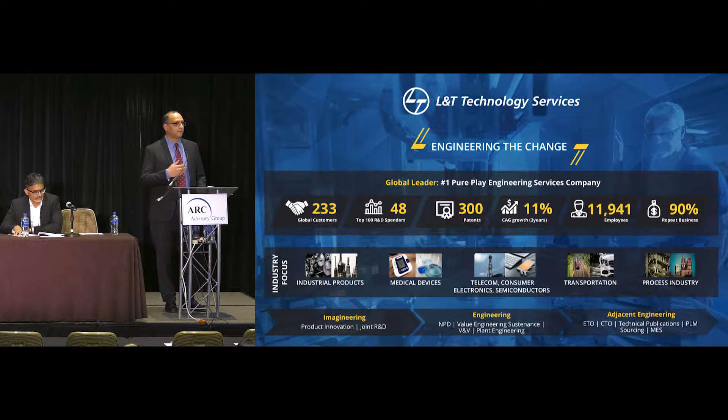Vinay, would you allow me to add a little bit here? Yeah, please, go ahead.

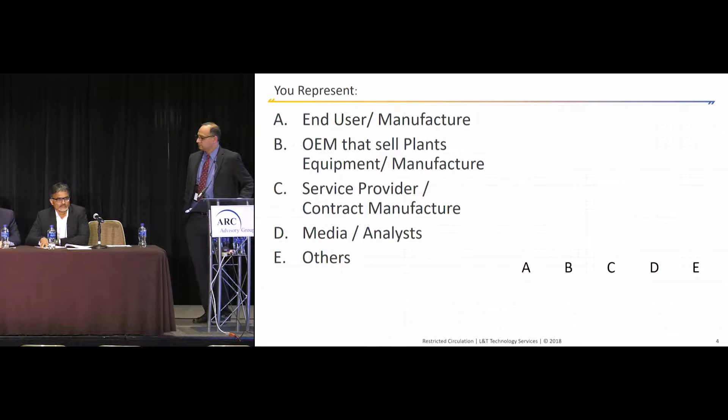When people go to work with an engineering services organization, I highly recommend that they choose one that has a PLC or DCS control systems practice, so they really understand what goes on in those systems and can integrate with them properly. L&T Technology Services has such a practice. They know how to spell PLC and DCS and work with those systems, so they're very competent in the industrial space.

Can I expand too? No, please, go ahead. Because it doesn't fit into a question.

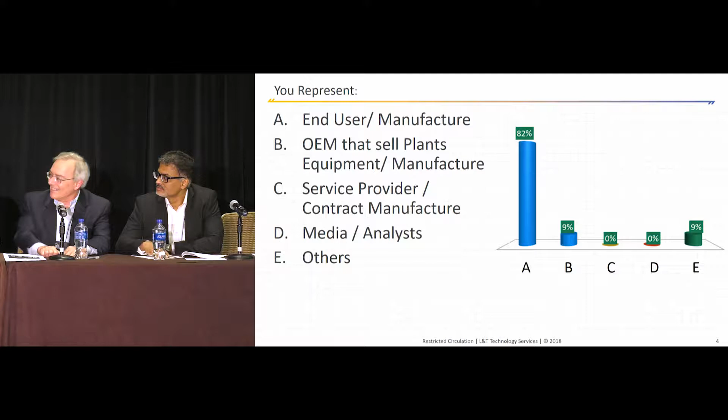It actually could fit into things about challenges - the idea of a company who really understands from data to the cloud down to the device, whether it's designing a machine, getting the data out of the machine to something in SCADA and making meaning of it, or knowing what you're going to do into the cloud. I've not met anybody who is really able to explain to me an end-to-end solution like they have. That's why I'm working with them. Kind of blew me away, really, to be honest.

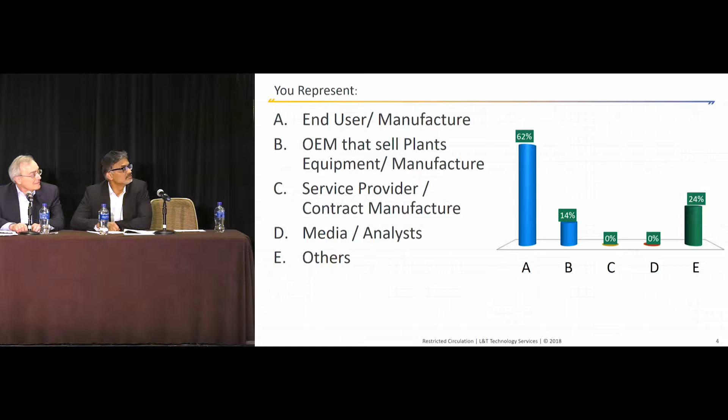Moving ahead, if we were to really look at the diversity which we have in this group, there's a lot of end users and manufacturers coming from manufacturing space. About 62% is end users. It's changing, so people are still voting. So maybe we should pause, Samir.

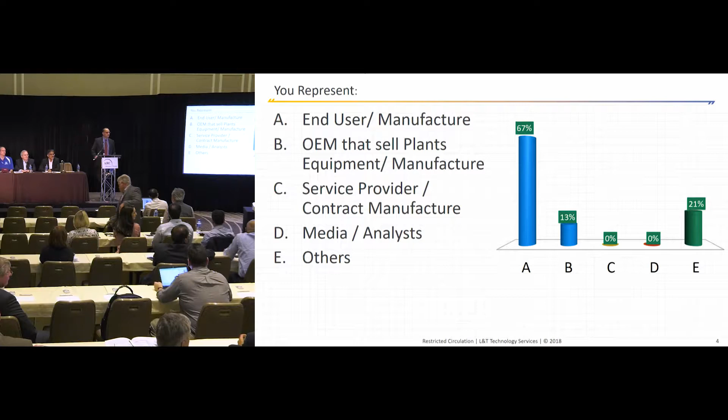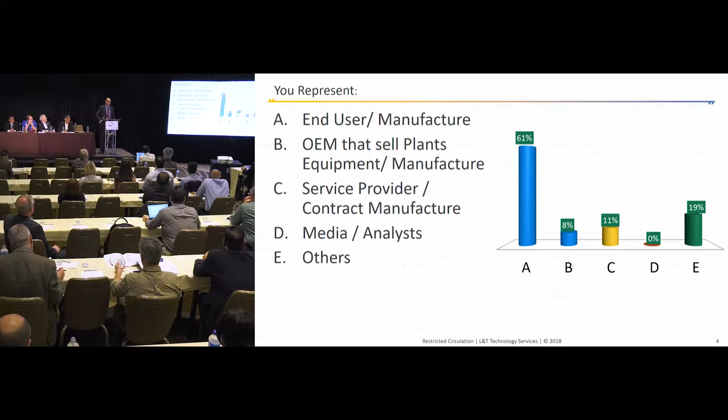So if you can just vote on this, we'd like to capture what mix we have from a participation standpoint. They didn't give me one of the beepers, so I can't press D.

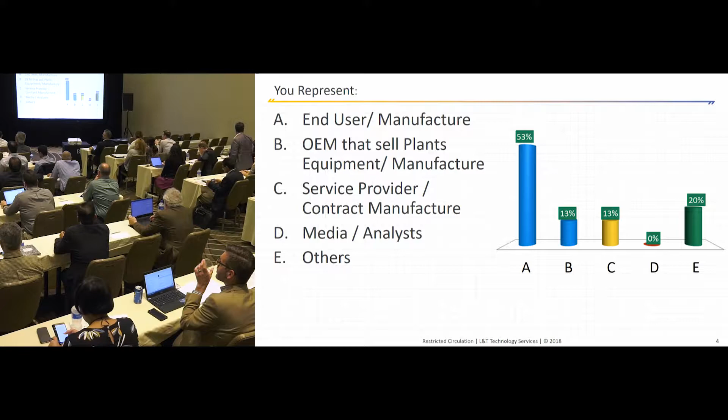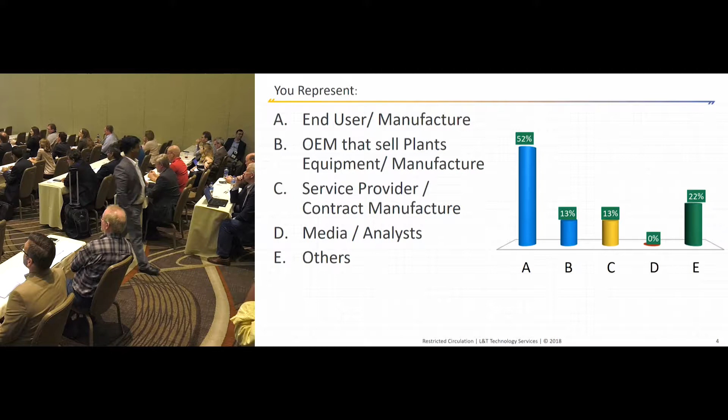So I think we have about 52% of end users, and then 13% we have OEMs.

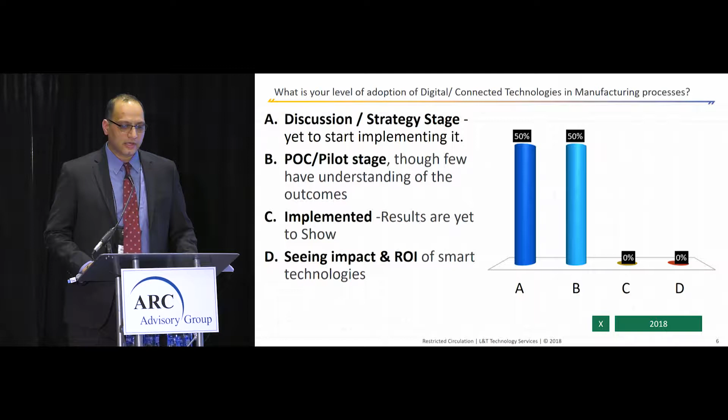Can we move on? So if we were to really look at the maturity curve of where the digital or connected technologies in manufacturing are going, please take another couple of seconds. Select A, B, C, or D on the remote so that we capture where you or your organization is, at what state - still devising some strategies, or running some pilot projects, or you have implemented and are seeing some results.

So it's very interesting. What it shows is about 16% are still devising the strategy, 52% are running the pilots.

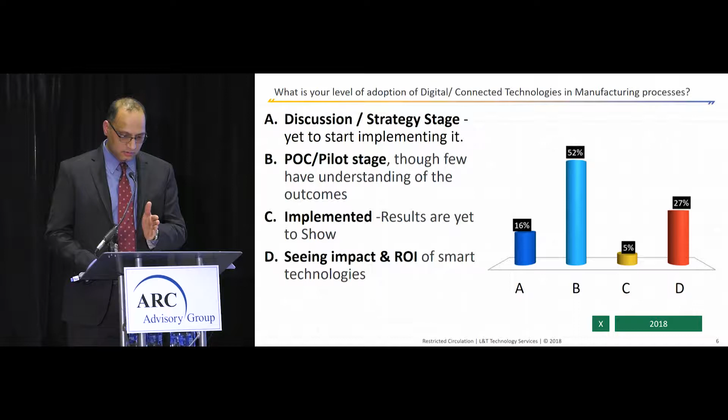So if we were to really compare this from last year - let me first finish. So 5% have implemented, and 16% are still looking at it.

This is last year - just go back to the current, if you can please. So 27% have also already started seeing the impact on the return on investment. So it's pretty consistent with the last year, but there were a few changes.

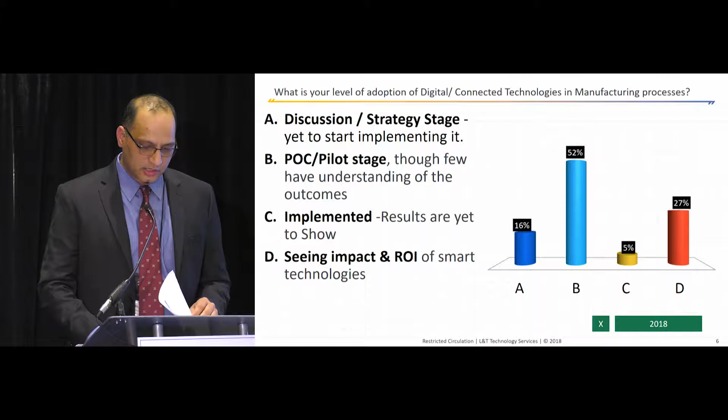So if you can just go back to what we captured last year. Okay, so it shows that about 16% last year were seeing the impact, and 41% were running the pilots. So it's a very natural progression in terms of your ROI.

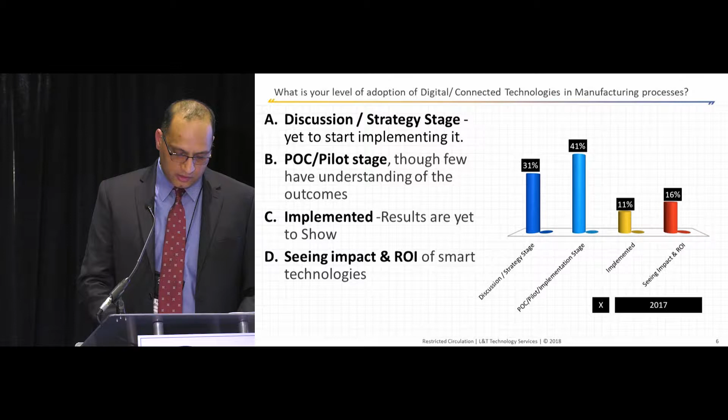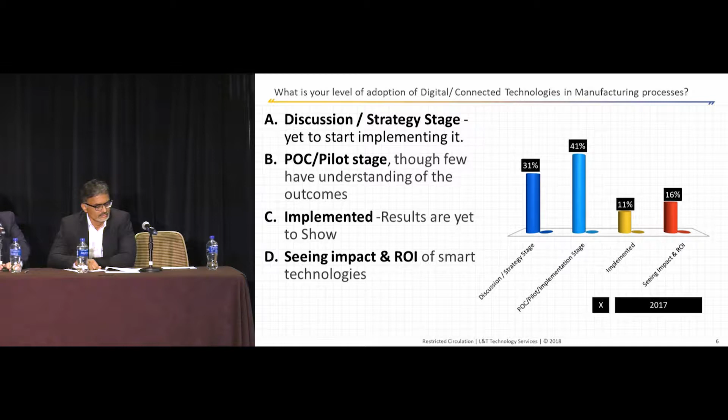So if we kind of move to our panel here and ask you questions. Ralph, if you see the shift from the POC to seeing the ROI from the implementation or the investments which people have made in the digital world, do you see the same shift when you talk to the larger audience and the variety of companies?

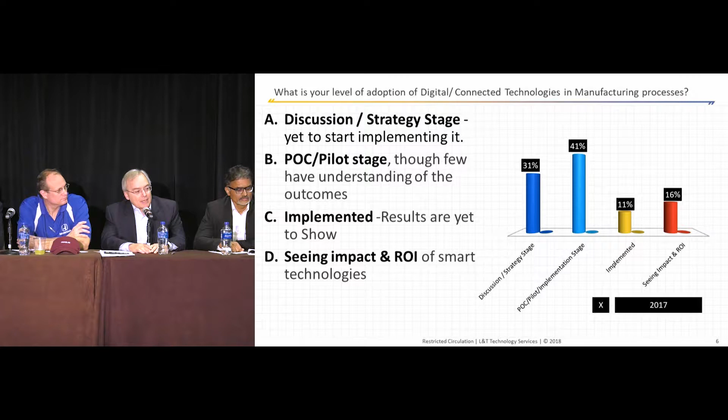Yes, yeah. It's amazing to me because over the years I've been able to watch a lot of markets and application areas go from just barely emerging to mature and adopted in a lot of locations. And it's amazing to me how quickly this industrial IoT, analytics marketplace has matured. It was just 3 years ago that when ARC was writing about it, it was an emerging technology - very few people had done it, and there were actually very few suppliers who could work with it appropriately or had products. And now, just in 3 years, it's amazing to me how rapidly this marketplace has matured, where there are good solutions out there, proven examples of how it achieves real business benefits, and solution providers like L&T TS who can help out.

This technology does have a variety of technologies in it. Part of it is in the cloud with analytics, so understanding the technologies associated with that. But every solution also has to have some networking in it, because you're networking and connecting information, and you've got cybersecurity involved, and then there's also the on-site part of the technologies - how do you do the data acquisition and stuff like that. So this brings together a lot of different technologies.

So when you go to implement, if you hired all those people yourselves, first of all it'd take a long time just to get the right talent. And second of all, what do you do with them when the project's over? So I think at this point it's very beneficial to bring in somebody who's done it before and can swap in the right skill sets as the project moves along, and can achieve more rapid time to benefit than if you try to do it internally.

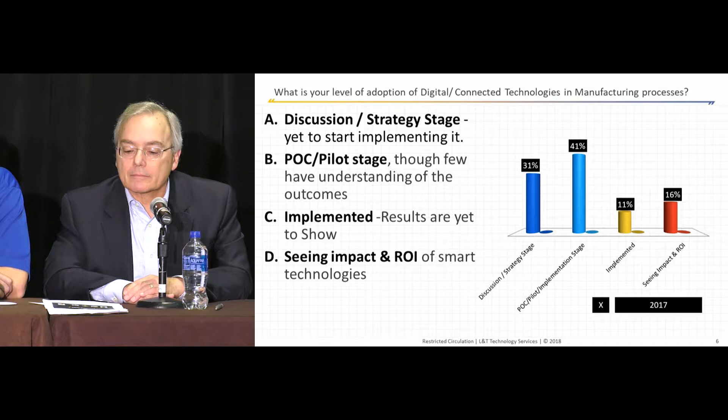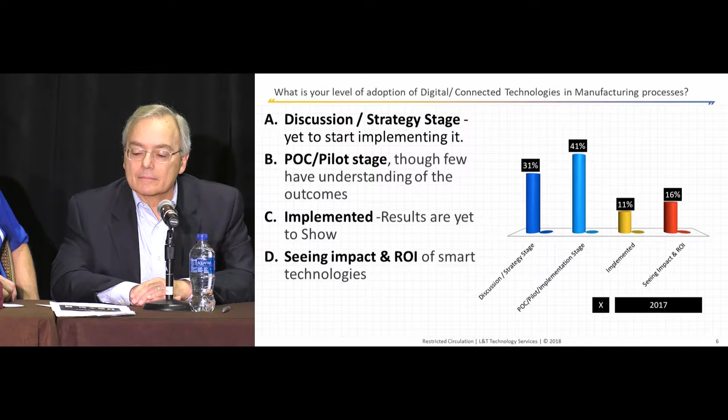Thank you. Dale, if we were to look at your ecosystem, how you pick the projects and are able to go back to the management and justify the ROI - how do you track any experience which you have gone through in implementing some digital technologies or solutions?

Oh, yeah, absolutely. I think one of the biggest problems that I see a tendency to happen is for people to want to go out and find a solution and then try to find a problem to apply it to.

And really that's just backwards. Understanding what your pain points are in your organization. If you know your organization well, if you know the front lines, if you know the people, you've got those relationships, you can identify those areas, and then you look for the technologies and how understanding data, how making sense of it can benefit them. And really, it's not that hard to do.

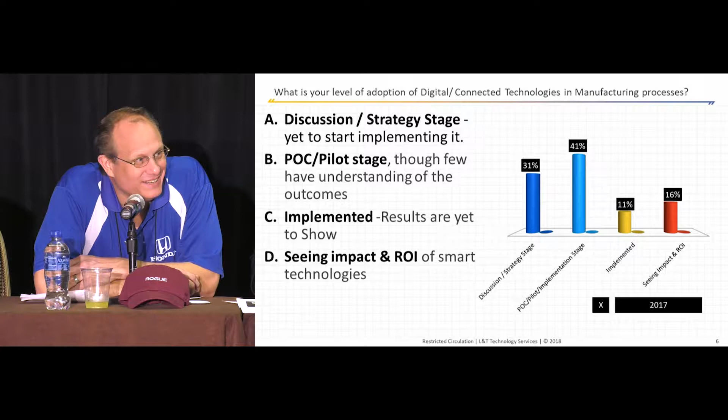Everybody's drowning in data. It's like pirate's treasure hidden somewhere, and you need the secret map to get there. You've got to know a guy. Hey, he knows that SQL query, and he's got security access to that database. And just making it available is profound.

And that gets buy-in. You get a fan club in your organization. People are like, hey, we've got a problem. Let's go to Dale, he can help us solve this next problem too. Getting that kind of buy-in, getting that support is key.

Okay, Prabhakar, since you are servicing both process and discrete manufacturing customer base, do you see any particular industry leading the digital implementations or digitalization, or any thoughts and views on that?

Tough question. Because if you look at the digital world, like Ralph mentioned, there are a lot of conversations happening, but there's no empirical model against which we can say the maturity of the industry or adoption, or any of those like SCOR or any of the manufacturing practices.

But having said that, from a vantage point of a service provider who has been interacting with customers right from the design, manufacturing, and other areas, I would say that different industries would have maturity or adoption at different levels of process and technology. Again, it's not a judgment on the industry.

For example, if you take process, traditionally they have been very good on shop floor automation, L1 and L2. Probably what they're not been doing well is taking that data into the next level of abstraction in terms of using it for new digital initiatives.

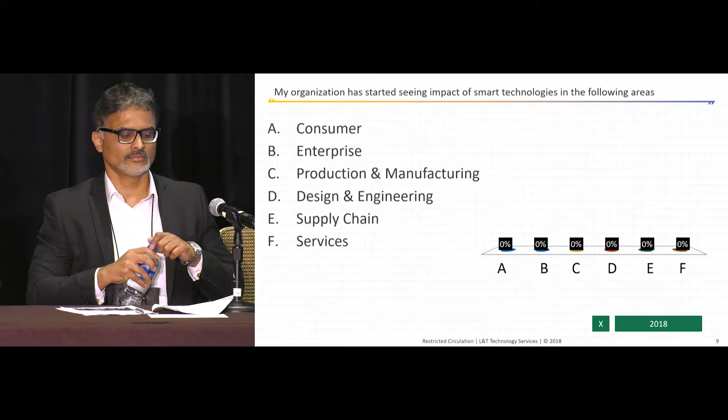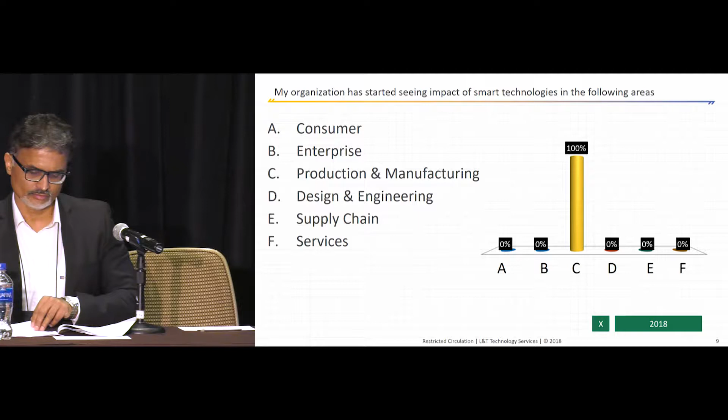Maybe you want to go next, since I moved. Oh, you want to do this one? Okay.

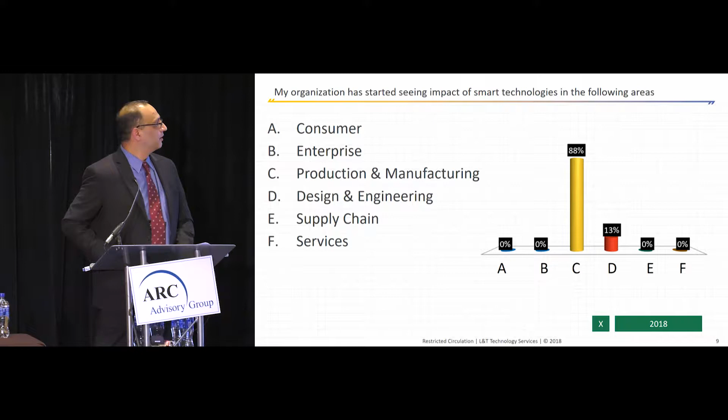So the question is, my organization has started seeing impact of smart technologies in the following areas. If you can just take a few seconds and respond to this, that would be great.

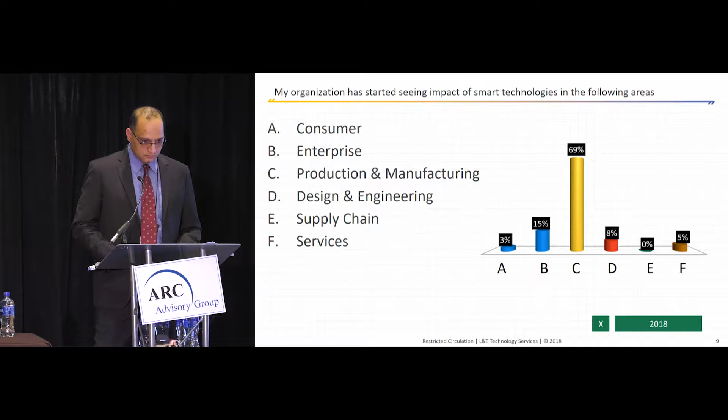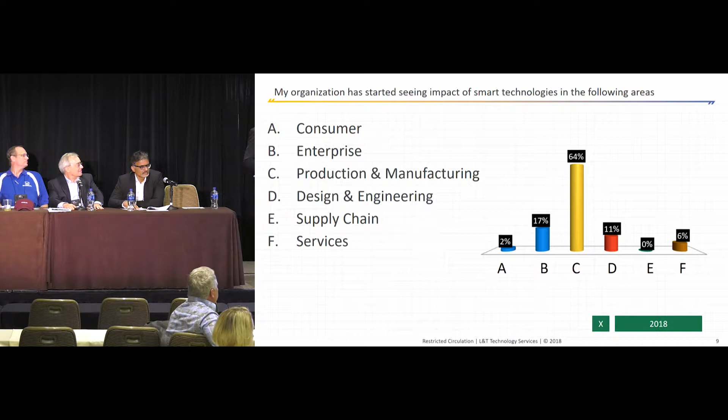So basically what we're capturing here is about 60+% has started seeing the impact in the production and manufacturing, which is pretty interesting. Last year it was about 24%. So it's increasing. I think it definitely links with our previous poll where it said the ROI is, companies have started to realize the return on investments.

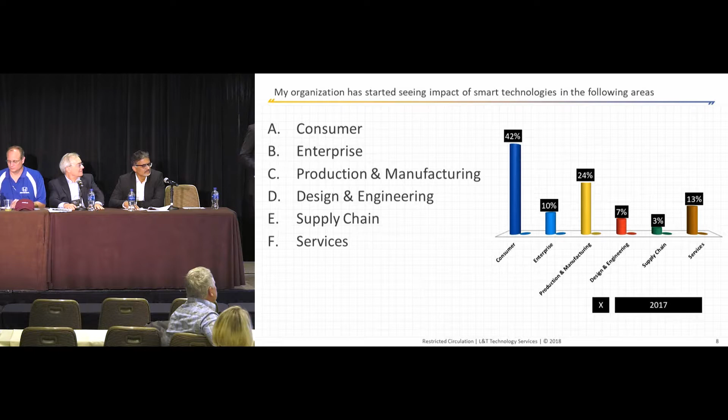So, yeah, can we move to next? If you can take again a couple of seconds for your manufacturing process, if you can rank the biggest challenge towards adoption of smart technologies.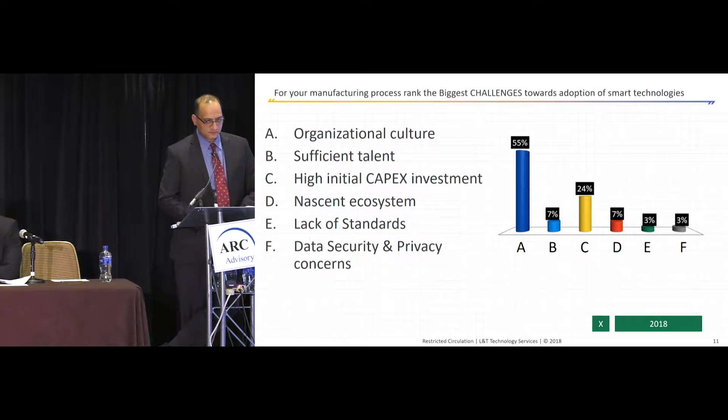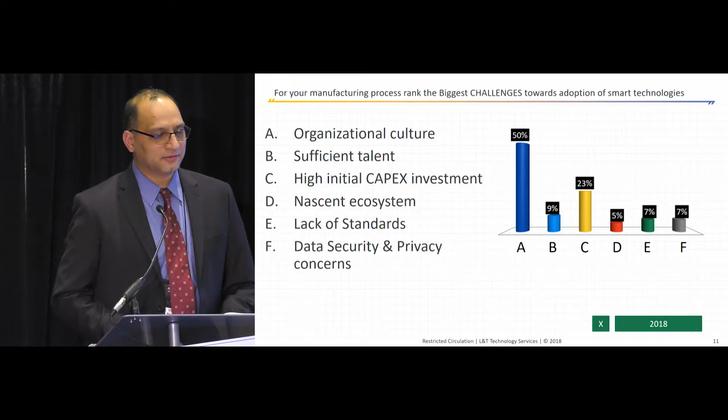So this challenge has not been addressed since last year. Last year we captured about 42% of people said they are having challenges within the organization. It's an organizational culture which is becoming a challenge for them to implement smart technologies. I think that still holds true.

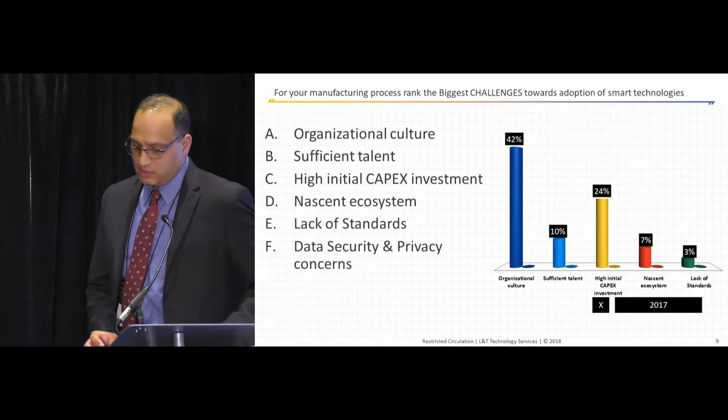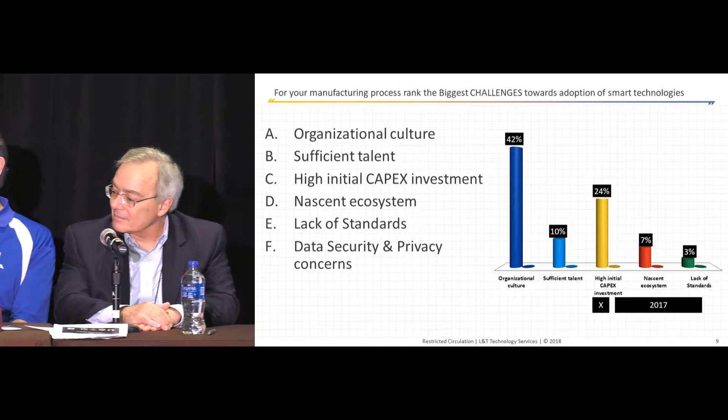So with that, I'd like to invite Dr. Ashwini. What is the biggest challenge you see in your ecosystem? And if you can highlight maybe top 3 challenges, being an OEM and taking the digitalization or IoT into your space. Yeah, thanks for the question.

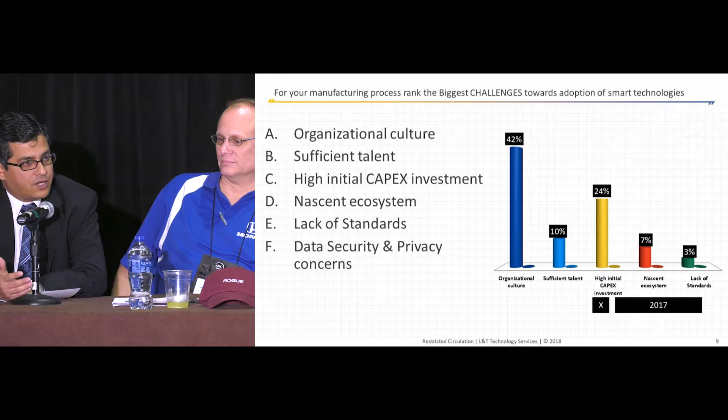And I think it is interesting, right? If you look at 2017 and 18, the one thing that has not moved is the impact of organizational culture. You see the technology is coming along very fast, tools are coming along very fast. One thing that is not changing is the organization culture, and that reflects in all the opinions we are getting. For us, that is definitely one of the things, because the important question is what culture means for an organization. For us, our understanding of culture is that being Halliburton, a very customer-centric organization, we have very close association with the customer.

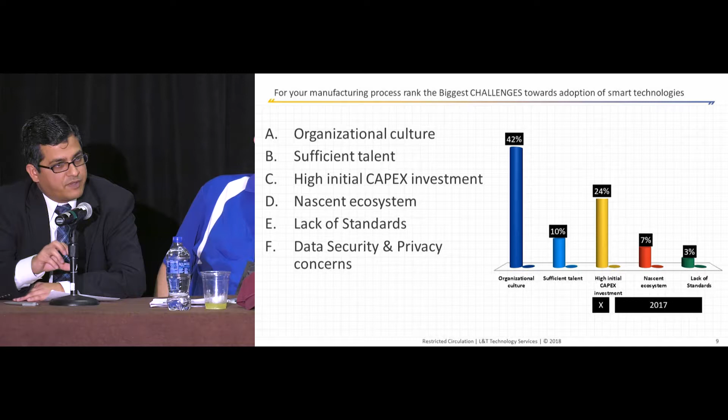And when we do reality checks with the customer, where they see the value and where they want to see where they are going in the future and what our demands are, for us that organizational culture is more driven by that demand we see from the customers. The more it is integrated, the more the customer sees that they do not want the same services from 10 different business organizations. We need a single solution from 10 business organizations, and that basically enforces a customer's demand as an envision for our own company.

And we're saying, no, I think there is a gap and we need to integrate, and that's where we see the biggest impact of digital transformation coming to it, where not only are we bringing data into play, but also bringing the domain integration of domain expertise, as well as bringing a singular solution to customers. They don't want 10 siloed solutions. So getting that individual solution into a much more integrated single concept, that was initially the biggest challenge we had. The other challenge that always stays with digital transformation is why.

Every business objective, every business vertical in an organization has their own objectives. And they want to know if I have to change, why I have to change, and where it is going to impact. That is a crucial question, and that sometimes takes longer than you expect to get an answer for. Unless we have an answer for why you should change, it is very difficult for someone to change. So that is the second aspect we have realized is the biggest challenge.

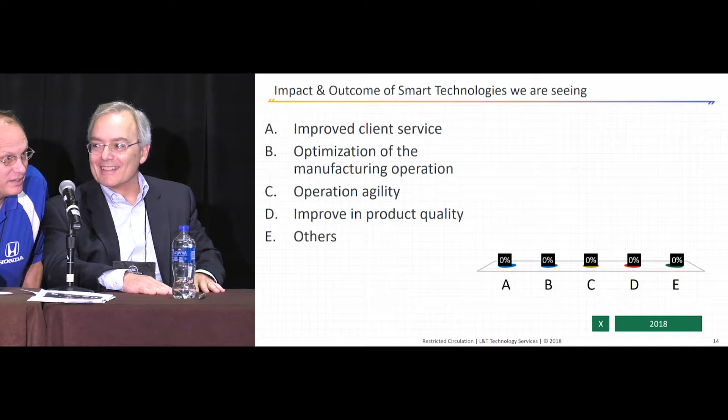All right, that's a debate by itself. Yeah, it is a debate. We'll fight about that for years.

I think our next question is the impact and the outcome of smart manufacturing or smart technologies we are seeing, or you are seeing, in your ecosystem. If you can respond to this question, please.

I think our response is pretty consistent, actually. It's manufacturing operations, and then we are also seeing the operation agility, which is pretty close to asset availability. But isn't the audience here a little bit biased, coming mostly from operations? Yes, client services. Yeah, I mean, that's exactly consistent from a standpoint of if you look at the representation we have in this room, it's from manufacturing.

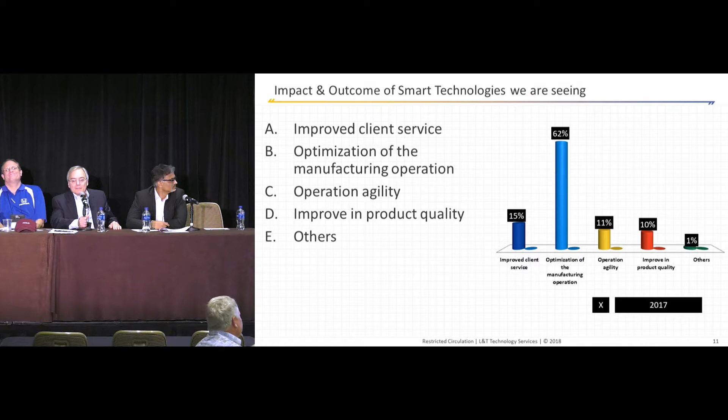Well, I'd argue that big data isn't useful until it fits into one of those other four buckets. Yeah, please go ahead. There's a huge bleed over between B and D. I mean, if I'm on a manufacturing line and I'm looking at optimization, part of my optimization considerations is the improvement of my end product quality.

Yeah, I mean, the improvement of product quality is also, you will see some people are here from product engineering background, so they're also trying to improve the quality of the product. And this manufacturing operations is more from what we are doing in the manufacturing, how we are improving that.

I would say from a Honda perspective, it really doesn't matter to me usually if a machine is running or not, if it's not putting out good quality. I mean, that definitely relates. I would say I would put your answer in quality if you're talking about quality, but there's a whole lot of things about machine optimization that have nothing to do with quality. But if it is, put your answer into quality. If it's not, if it's talking about efficiency, if it's talking about overall reliability of that machine, utilization of that machine, then put it in optimization.

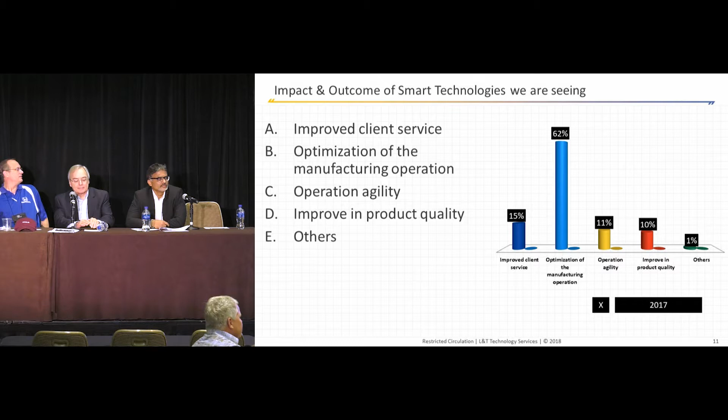Can we go to the next, please? Again, if you can take a few seconds, please rank your topmost digitization priority for 2018 and 19.

I think clearly we see that adoption of predictive analytics for asset management, adoption of industrial IoT and asset management. So it again comes back to improving your operations and having the assets available while you're running your plant. So that's what we see here based on your response.

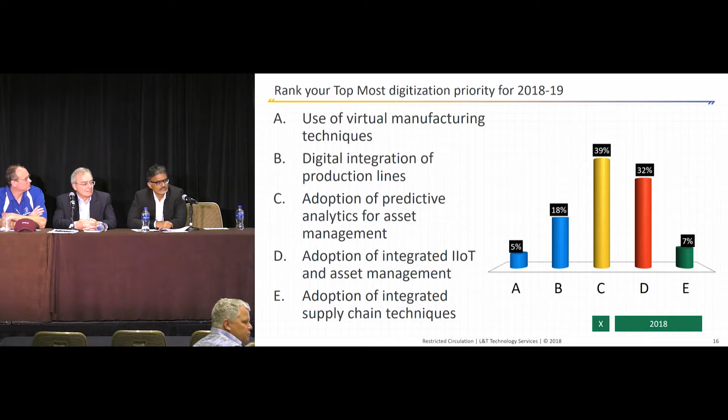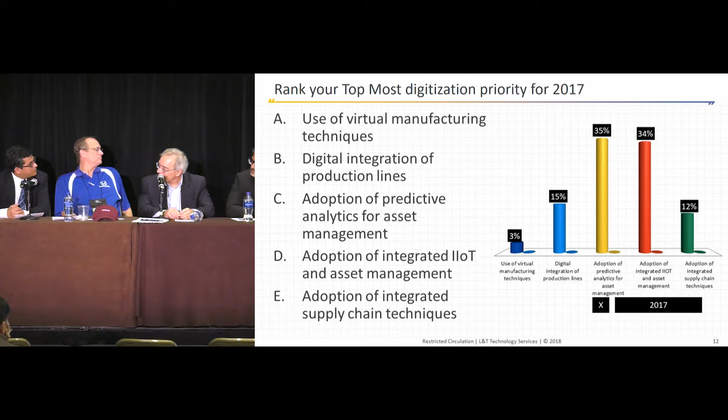So, Dr. Ashwini, do you see a similar opportunity in your ecosystem? Yes, very much actually. When I see the C and D options and how people are voting, it definitely shows we see the similar pattern in our organization and in our industry.

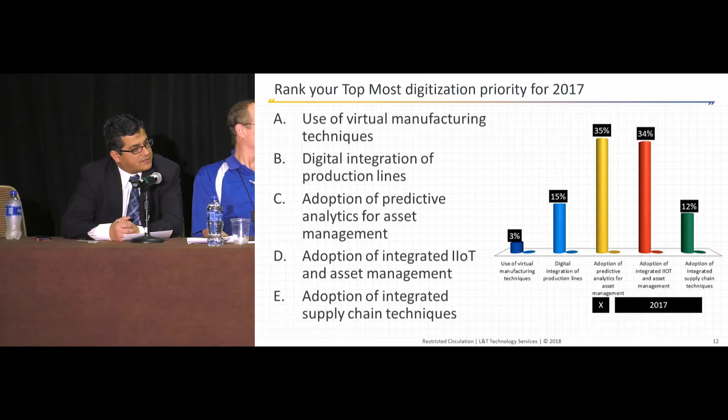Another thing driving priorities for us as Halliburton is automation across the board - drilling automation, completion automation - because for us, putting less people on the rig comes down to quality and HSE practices as well as cost. So for us, automation is one of the biggest priorities.

And when you are looking at automation, it is not an entity just by itself, operational efficiency goes with it. So predictive maintenance is part of that, and the industrial IoT. So that is definitely one of the top priorities for us.

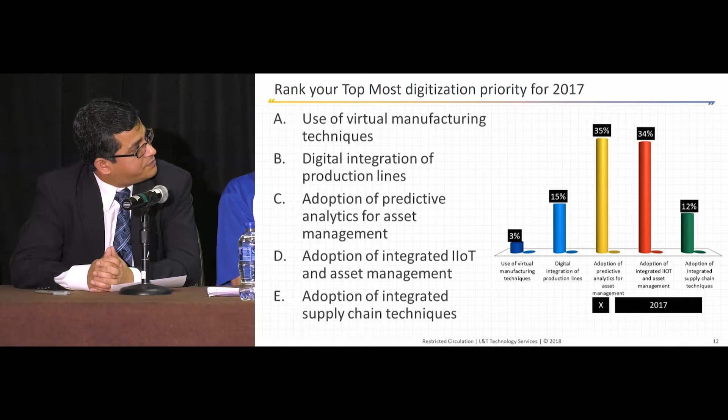Okay, thank you. Ralph, would you like to chip in here and give us a little bit broader view of what you are seeing in the industry from a prioritization standpoint when it comes to smart manufacturing?

There's a piece I wrote recently around digital transformation and what is digital transformation. By the way, it's available through the app - if you go to my name, under staff or attendees, I've got collateral loaded there, and one of them is an insight on this topic. I'll describe it very shortly. There are three types of digital transformation. It's become an overused word, so I felt the need to define it.

The first is inside the box. That's where you are automating or optimizing an existing business process within your facility. That could be something like predictive maintenance on a particular piece of equipment.

Then there's outside the box, which is aftermarket services. So if you're an equipment maker, it's monitoring remotely the condition of the equipment in your customer's plant. But it could also be the supply chain - providing information to your customers about where the products are, the cold chain type stuff and things like that. So that's inside the box, outside the box.

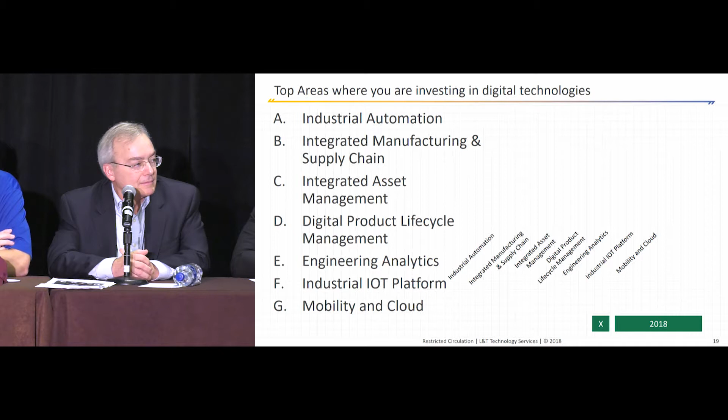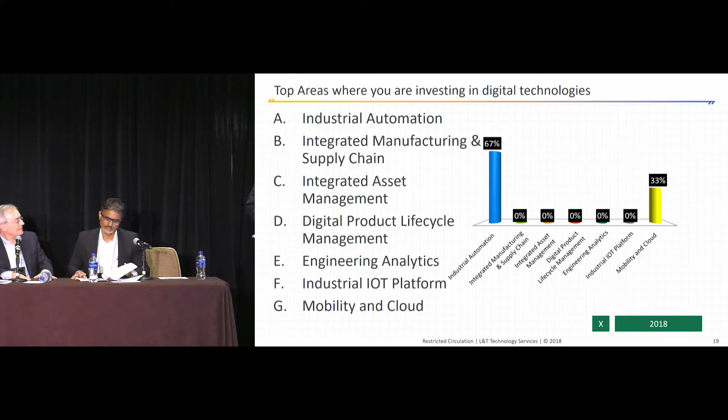Okay, thank you. Can we move to the next? Take a few seconds if you can respond to the question: top areas where you're investing in digital technologies. I'm not seeing everybody using the remote on the desk.

Okay, I think what we are seeing here is industrial automation is definitely a space where maybe some retrofitting is on, or enhancing the capability of your control system. So that's where we see this going.

So I think we are almost towards the end of the session, but we'd like to open this to the audience here. If you have questions for the panel, we encourage the questions and have a little bit more interactive section here.

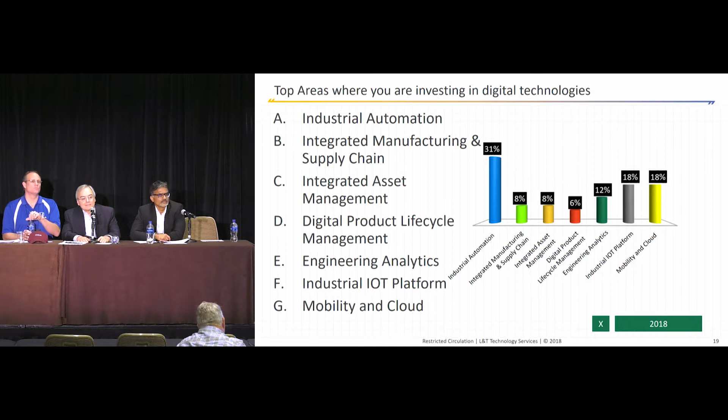Yeah. Hello. Yeah, we can. Yeah. I'm Bala from Reliance Industries, India.

Responding to ROI on initiatives, that's a quite traditional approach, right? And many of the opportunities presented by new technology advancements require innovation courage, which is a fail fast, improve fast kind of approach. So should we really go down the path of ROI? Because if the ROI is not appealing fast, then the initiative gets stuck, and we kill a bright idea at the infancy stage. So what is your approach, panel recommendation on that?

Thank you, it's a very good question actually. I think I will take that question. The fast fail approach is something that we use in practice, even if the ROI question is there. The point is that what you do not want to do is abandon the ROI proposition as a business, because that's the imperative and how we run the business.

The point is, to achieve that, you have to take the fast-fail approach. You want to do innovation in a shorter time span where you fail fast and change your solution. Because your goals are set on where you want to go, and because you see the opportunity, it's not just about ROI, it's the future opportunity we're looking at. So ROI is just one instrument, another way of demonstrating to management. But shorter time spans where you fail fast and innovate faster is always part of the new ecosystem where digital technologies are going. You have to experiment, but experiment fast, fail fast, and learn quickly.